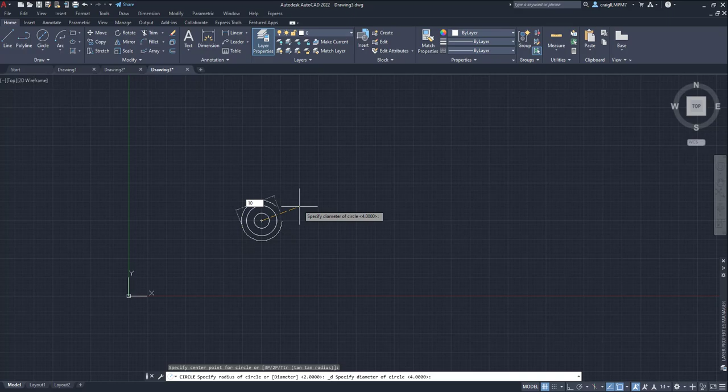First, I'm going to draw 3 circles. Where is not particularly important. I want one to be a 2-inch diameter, another to be a 4-inch diameter, and the next one to be a 10-inch diameter, all centered on the same spot. So what I'm going to do is make a 2D disc brake real quick.

So we can start with our polygon. We'll come up here, it's next to the rectangle drop down box. Oop, need one more circle. I need a circle with a center diameter, and I'm going to make that 0.75, so 3/4 of an inch.

So now we're ready to get our polygon tool, which is up here in the drop down with the rectangle, and I want a 6-sided polygon. So if that's our stud, now we need a nut to go around it. We have inscribed or circumscribed. An inscribed is going to fit inside the circle, a circumscribed is going to fit outside of the circle.

So I want a circumscribed 0.75. And now we've got our nut and our bolt. One is never going to hold a wheel on, so...

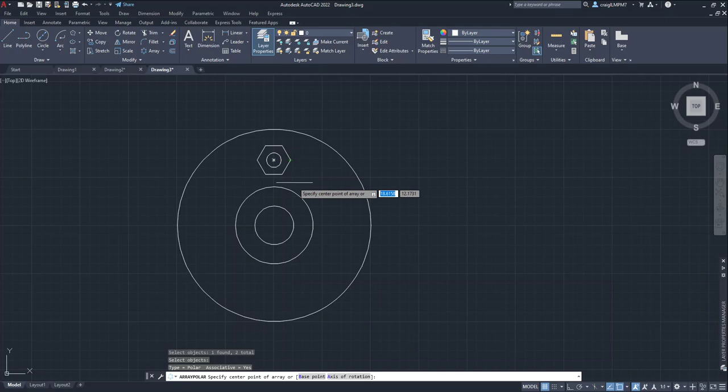Easy way to deal with this is we can come up here to array. We're going to pick a polar array, and we're going to select our 2 objects, press enter. It wants to know the center point of our array, which is going to be the center of our circle, and it correctly assumed 6, which I was going to use.

You can change that number to whatever you want it to be, such as 8, as you'd see on a heavier duty truck. You can also change how far around you want them to go. If you only wanted them to go 180 degrees around, you could do something like that, but then the truck would probably roll kind of funny, so we'll stick with our 360.

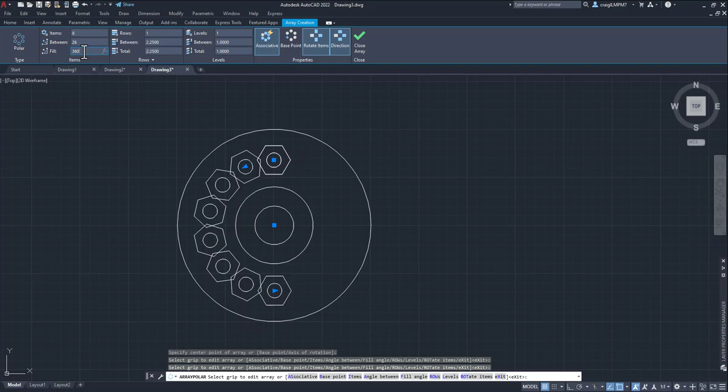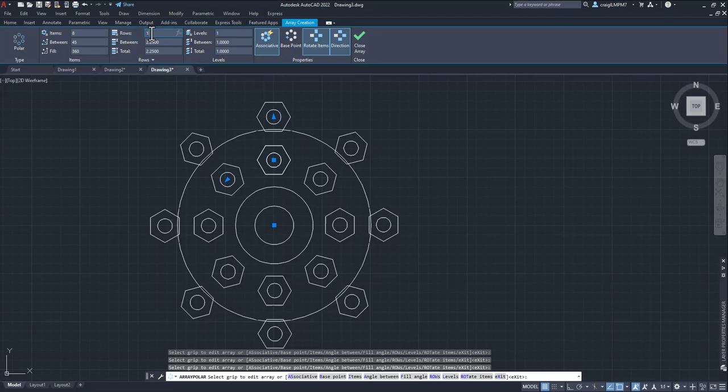And of course we've got other options. We can select multiple rows. That's not doing me a whole lot of good for what I'm trying to do, but just wanted to show you anyway. So I'm going to put it back to 1 row the way I wanted it.

You can have levels. It's not really showing here, but that's how we create our... that's how we use polygons and polar arrays to create things quite simply.

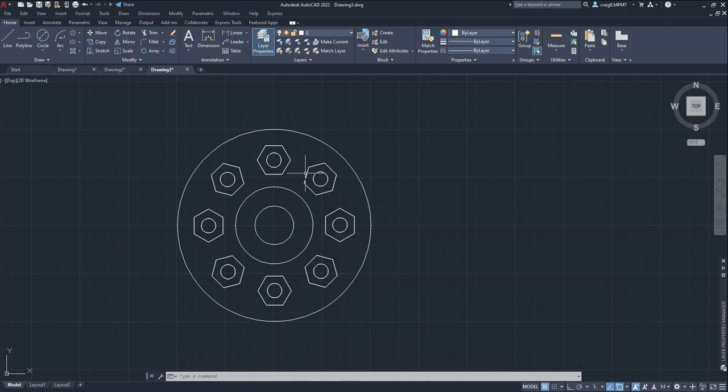Now, if we actually wanted to make these, we would probably be cutting the outer circular part out of a solid piece of steel, and possibly some of the others. So we can come up here, and if we were going to cut them out of a big sheet of steel, we would want to use the rectangular array.

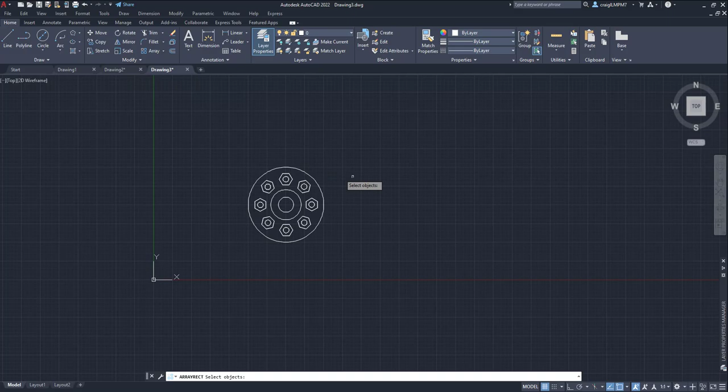So we can select our entire object, and we've got a 3x4 right now. If we were cutting that out of a 4x8 sheet of something, that would be wasting a lot of material. So we can change our columns, which are the ones across, to 8, and we can change our rows to 4.

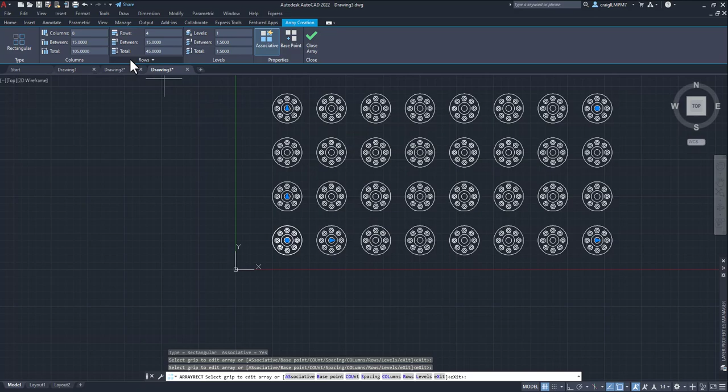So that's what we want, but that's not going to fit on a 4x8 sheet unless we mess with it a little bit. So we've got to change our between spacing, tighten them up. So if I come up here and change that to 11, change that to 11, that tightened it up considerably.

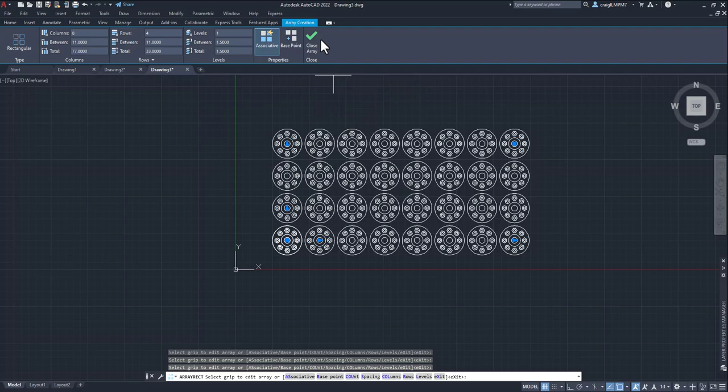So I think that'll fit now. We can close our array and check. So the easiest way to check would be to throw a rectangle around it. So rectangle, I'm gonna start right here, and yeah, it fits in our 4x8 sheet.

So that's one way we can make a whole bunch of parts real fast. So that's our polar array, our rectangular array, and our polygons.

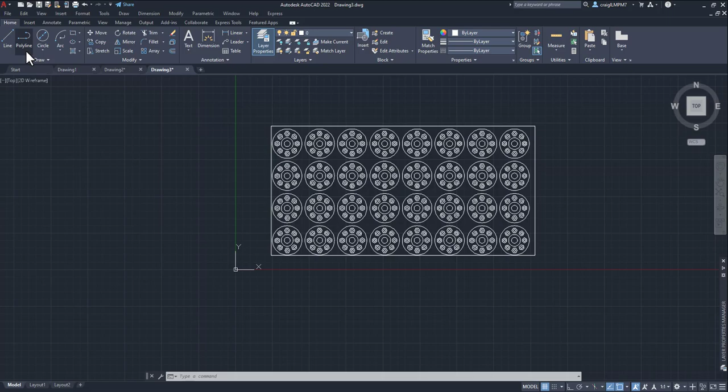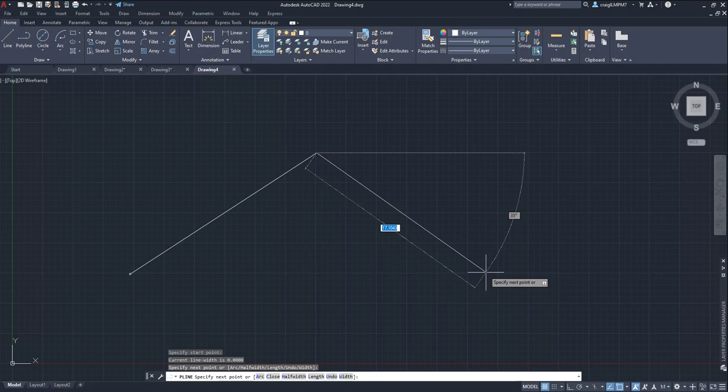And we're going to look real quick at one other thing. So we're going to create another new drawing in inches. And this time I'm going to take a polyline and create us a path for our stuff to follow along.

And I'm not going to do anything fancy. I'm just going to put a circle here. So we can put us a circle, center diameter. I'm going to make it about 1 inch.

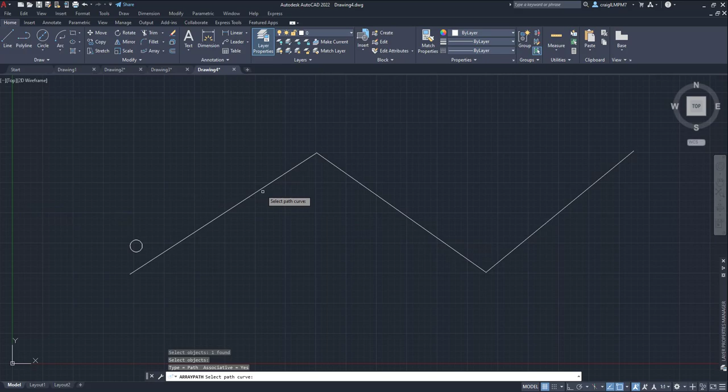So if we come up to our array and this time grab the path array, which is the only one we haven't looked at yet, we select our object, press enter, select our curve—that's why I made it a polyline instead of lines, because if I had drawn it with just lines, I would have had to join them. So I'm just selecting our line, and as you can see, it filled in a lot of things for us.

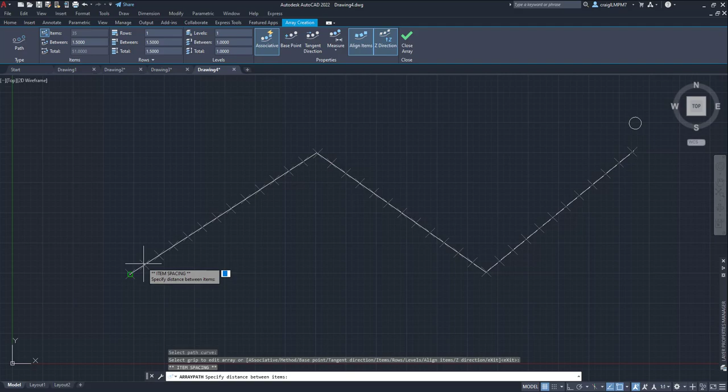Looks pretty good, other than it could use a little bit of adjusting, but you can click on that and drag them around a little bit. You may have to add and delete some if you're not happy with their final position, but you get the idea. So that's how you can use the path array.